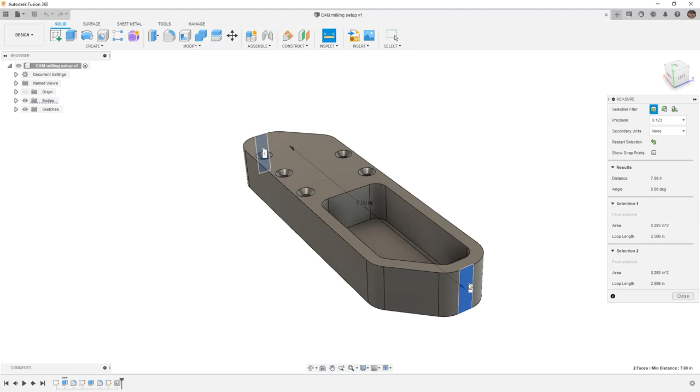Before we move into the Manufacture workspace, I'm going to use the inspect measure tool to get an idea for the size of our part. I'm going to start by selecting one side and then moving to the other, seeing that we have a part that's 2 inches wide. I'm going to left click in the canvas area to undo my selections, and then I'm going to rotate and see how far the part goes from one side to the other, seeing that we have 7 inches. Lastly, I want to see what the overall height is, and I can do that by selecting one of these edges and noting that it's 1 inch.

We also have another tool. If we go to Selection Tools, and select by boundary, we can select a body and get an idea of the boundary size for that body. In this case, 7 by 1 by 2 is the exact size of our part. When you're making a new part, generally you have extra stock on all sides so that you can machine it down to its final size.

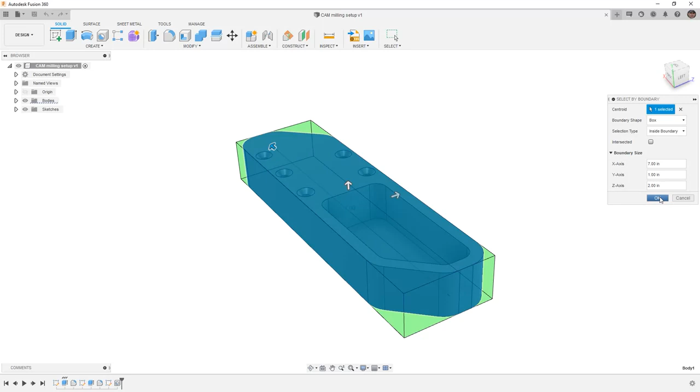In this case, our stock is exactly the size of our part, meaning the 2-inch width is exactly the width of the part and the 1-inch height is exactly the height of the part. This means that our stock is going to have to be quite a bit larger in order to give us enough to machine off the sides. We're going to say OK, and then we're going to navigate from Design to the Manufacture workspace.

When we get to the Manufacture workspace, I'm going to go back to a Home view, and I want to note that the units that are default in Design are different than the units that are default inside of Manufacture. So to get started, I'm going to change my units to inch, and then I want to begin creating a setup for this part. A setup will contain basic information about the coordinate system location, the stock size, and parameters such as G54, where the coordinate system will be located on a physical machine. This is found under Milling, under Setup, and New Setup.

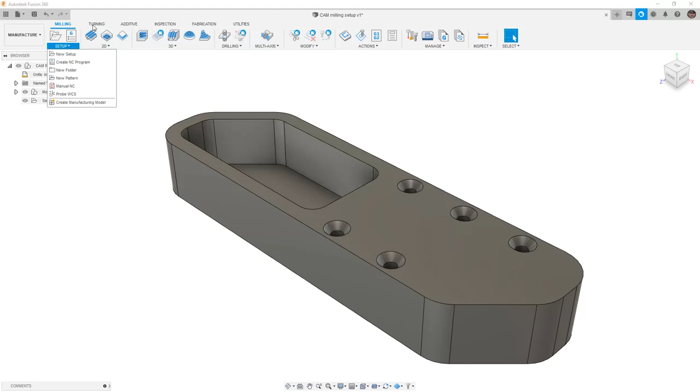It is important to note that Turning, Additive, Inspection, and Fabrication all have the New Setup box, but each of those will default to a different type of setup. So if you're accidentally on one of the other tabs, make sure your operation type is set to milling. We're not going to be using a machine at this point. We're simply going to move down the list and change our coordinate system, and we want to make sure that we set up our stock properly.

For this part, it was originally designed in the Y-up orientation. However, our machine is going to be in the Z-up orientation. Our tool will be along the Z-axis with cuts into the part being -Z, and travel up away from the part to the spindle will be positive. So we need to change the WCS or work coordinate system orientation. We'll do this by selecting Z-axis and the X-axis.

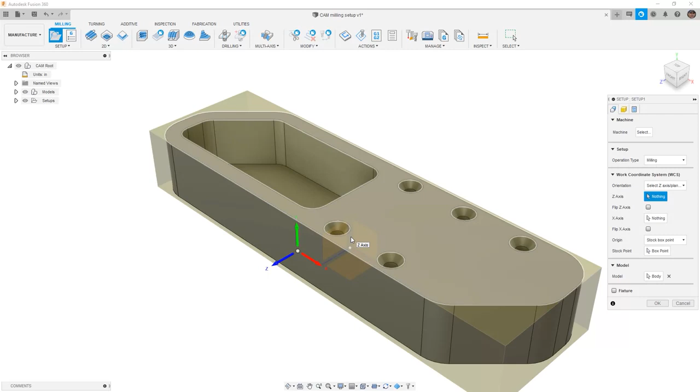This can be done by selecting an edge, one of the default axes, or we can select a face or plane. I'm going to select the top face of my part and take a look that Z is pointing up, Y is pointing away, and X is pointing down and to the right. This orientation is correct, however, the location is not correct. To change its location, I'll set the origin based on a stock box point, and I'll select the box point option and simply move it over to this corner.

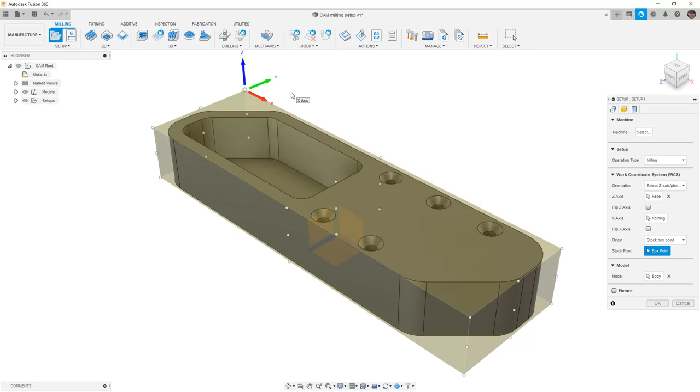This will represent the left side of a fixed jaw as it's positioned in the machine. This means that our X will travel to the right, our Y will travel away from the part, and Z up and away from the part. These are all our positive directions relative to the machine. From here, we're going to move on to the next tab, which is stock. Right now, it's defined as relative size stock.

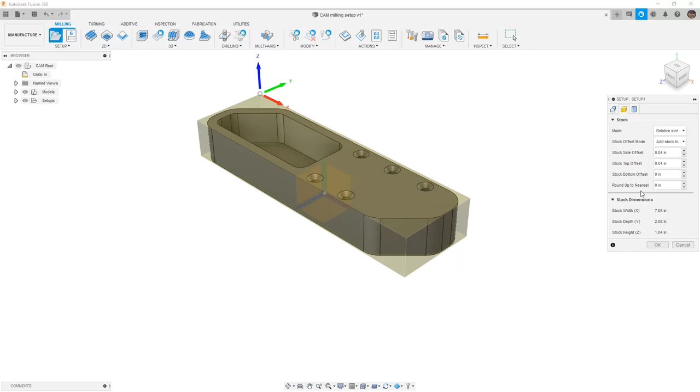Note that this gives us stock sizes of 7.08, 2.08, and 1.04 because there's no offset from the bottom of stock. Obviously, this is problematic as those are not real stock sizes. So in a case like this, where we have a part that has a size that roughly matches available stock, we need to determine how much needs to be machined off and what stock sizes we have available. For this example, we're going to be using a fixed size box.

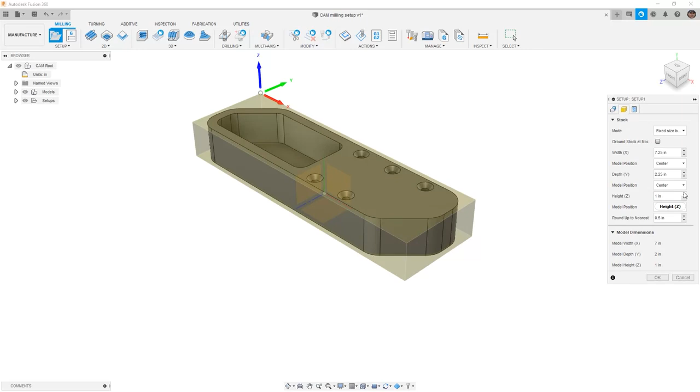We know that the part is 7 by 2 by 1, and we know that we need to have more material. So I'm going to set the depth to 2.25. I'm going to set the width to 7.25, since likely that's cut off of a longer piece of stock, and we're going to set the overall height at 1.25.

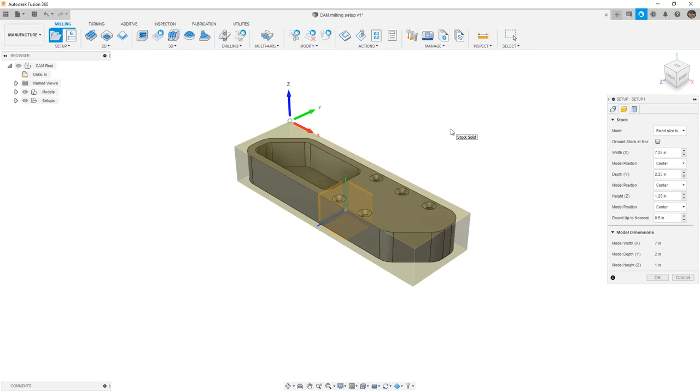If we look at this from the front or the right, we can see that we have stock around all sides of our part. I'm going to go back to a home view and note that this means that we need to machine all the material off of all sides of our part. This obviously could be problematic as we would need to have more than one operation. But in this case, let's go ahead and say OK to the creation of that stock in setup 1. Let's make sure that we do save, and once our design is saved, we can move on to the next step.